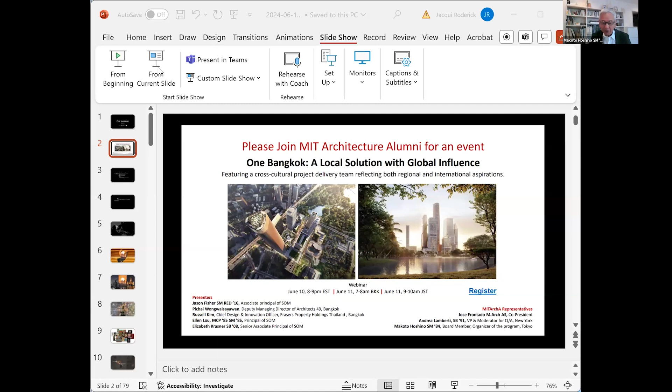I am pleased and honored to join you as an organizer of today's program held by MIT AA, but honestly, I'm a bit nervous as well. Probably more nervous than the day I turned in my thesis to my advisor back in 1984 at the MIT Graduate School.

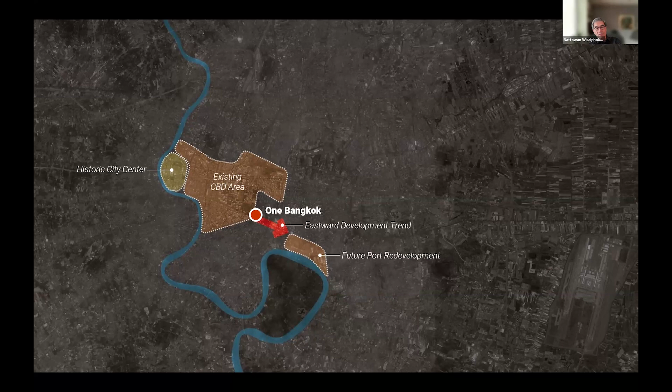The old, historic city center, you can see on the left, next to the main river through Bangkok, the Chao Phraya River. It comes from the north all the way down to the Gulf of Thailand. This is where the city of Bangkok started over 200 years ago. And then the CBD area keeps growing towards the eastern side. One Bangkok is pretty much at the edge of the existing CBD area, and the city is growing more towards the east. Jason, you can point out the future port redevelopment. That is about 1,000 acres of land that potentially will be developed soon, also next to the river. So if you want to add, Jason, please do.

Yeah, sure. It was an exciting opportunity for us at SOM to work on this fantastic site and continue with the growth of the city, and do it in hopefully a way that everyone loves. So yeah, very well explained, and thanks, Pichai, for the introduction. Go to the next slide.

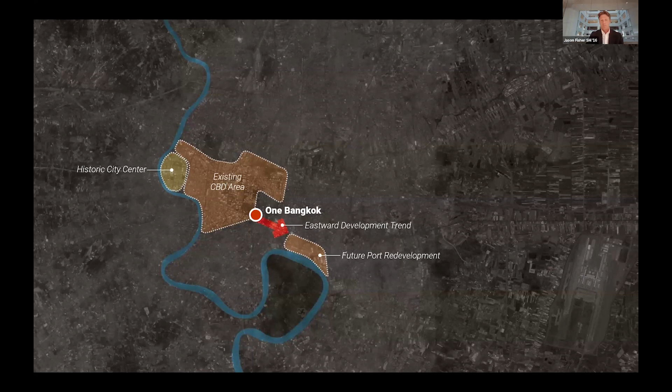So hello, everyone. Jason Fisher from SOM. I'm here in the Chicago office. We actually started work on this project back in 2016 with the overall master plan of One Bangkok. Between 2016 and the current day, we've been working alongside many other architects, designers, and engineers of individual buildings, and really benefited from the collaboration across the site.

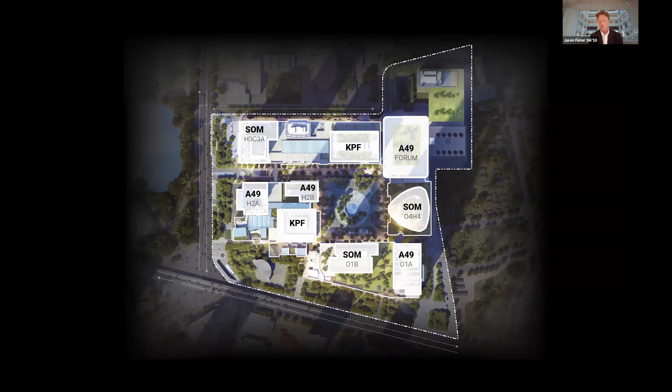So here you can see just some of the towers that are called out. There's KPF, there's SOM, there's A49. There's a whole retail environment done by other architects and designers, as well as numerous engineers and consultants along the way. What you saw on the previous slide was the overall master plan and design work after many years of development and collaboration between architects and our clients. But before we got there, we wanted to start with some of the important design principles and concepts from the start of the master plan phase.

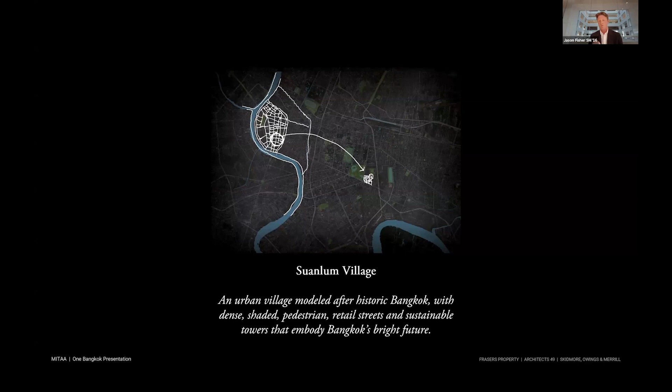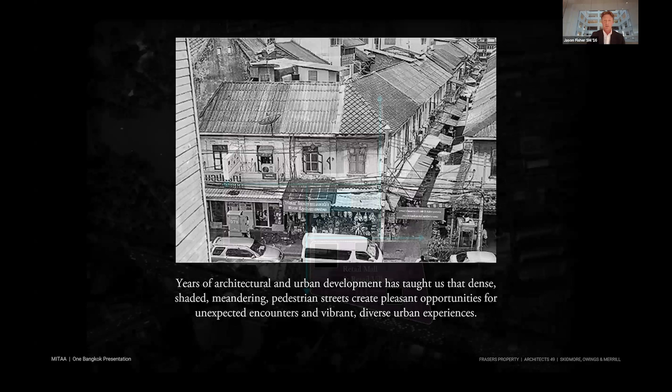Originally called Suanlum Village, we tried to organize a very large and prominent site by looking at the shape and pedestrian-friendly scale of the historic areas of Bangkok. So we tried to bring a little bit of that really nice chaos and intimate scale to the site of One Bangkok. These dense and meandering streets respond to the climate and provide a dynamic and varied urban experience. We tried to bring that experience and scale to subdivide this very large parcel, define distinct and complementary programs and uses, and accommodate a large open space at the center of the site. We'll touch on the importance of that in just a little bit.

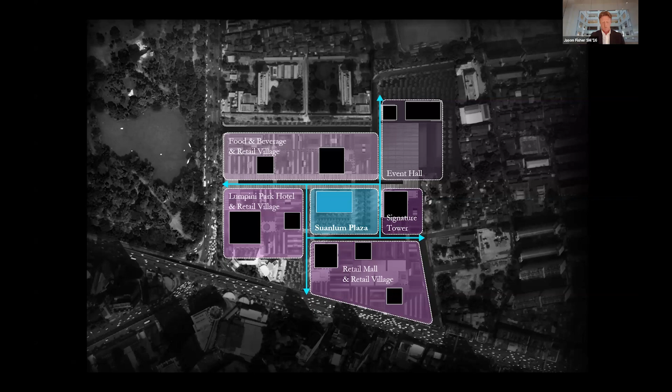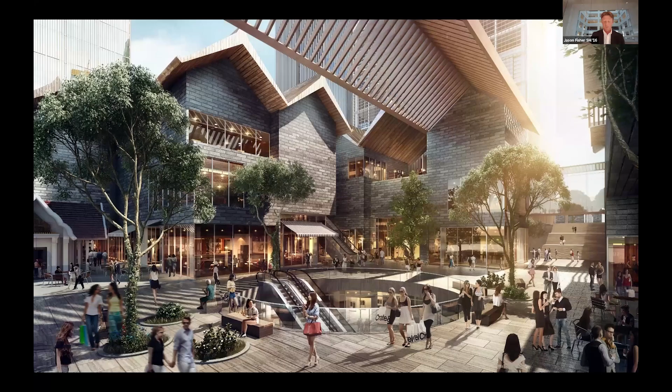Retail and pedestrian networks began to define a more intimate experience at multiple levels. You can see here the scale, the shading, the density of urban development. And to get to that point, we also studied the forms and vernacular of the architecture of the area. Very beautiful architecture that Pichai was mentioning previously. And then we tried to implement the forms in modern ways while still maintaining distinct architectural character and sustainability principles.

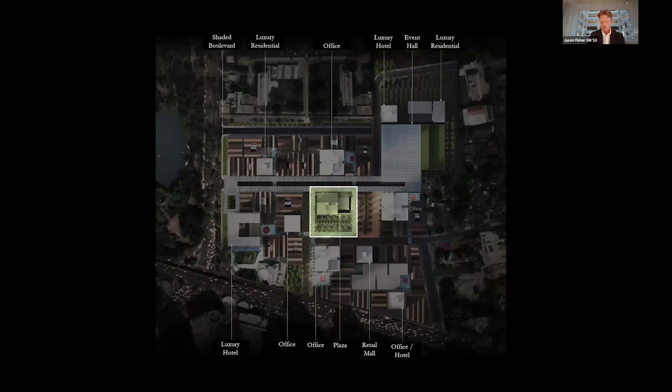We looked at specific examples of great public spaces across Asia, Thailand, the Philippines, China, among many other places in the region, as well as in our own backyard in Chicago, for inspiration and case studies as we developed the master plan. Throughout the master plan phase, we held on strongly to the idea of a great public open space shown here in the early version of the master plan.

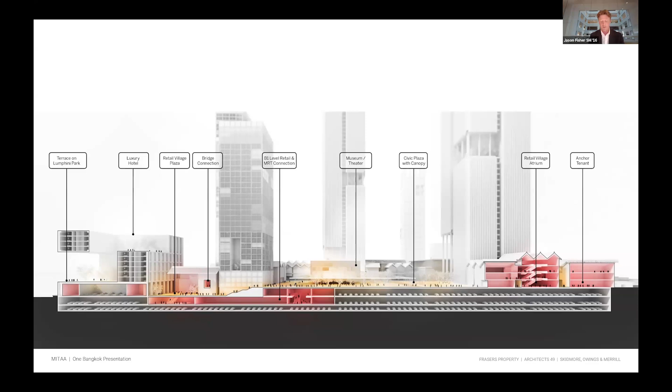And to achieve the best possible public open space, we leveraged grade change across the site to cover parking and vehicular circulation and prioritize pedestrian circulation across a multi-level ground plane. Of course, we couldn't ignore the stunning landscapes across the country, and particularly adjacent to our site with Lumphini Park, one of the great large-scale green spaces of Bangkok. And here you can see an overall view of One Bangkok from Lumphini Park, creating an impressive new skyline looking east.

And before tackling the architectural design of these buildings by SOM, a few important things to note. First, the overall site, scale, and design principles of the master plan remain throughout the entire process. And second, shortly after the master plan phase, other architects joined the design process, which created a really great collaborative effort. I recall design meetings in our evenings where KPF was presenting and we were listening in, and then we would present and other architects were listening in.

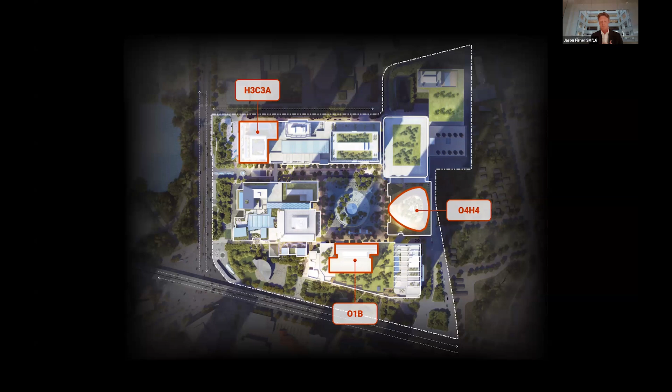And it was a way to test the validity of our ideas, hear a local perspective, refine our ideas, and then keep the process going. So it was kind of like the great studio environments that we all know, but done at a professional scale and on a really fantastic site. Of the three buildings from SOM here shown on screen, I'm going to dive into a bit more detail on the tower on the far right, which is the signature tower and was my particular role on this project as an architect.

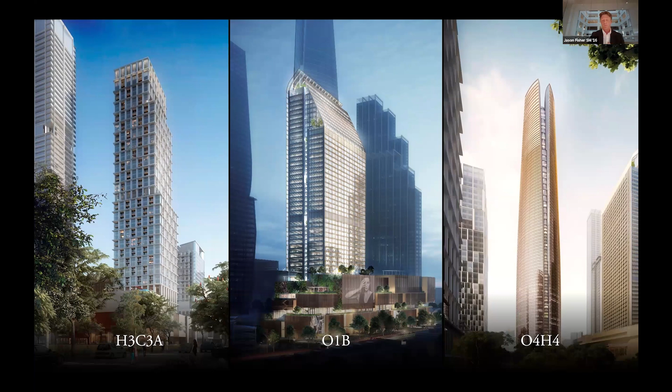So we call it the signature tower primarily because it's the tallest building in the master plan and anchors the edge of that open space. And from the beginning, there was a desire to find a form that made a strong impression on the skyline, but also related to the city through nature, culture, and climate. We tested several approaches, but landed on a tower form that related to the specific flora of the region. So here there was almost like an accounting of all the different flowers that we found prevalent in the area.

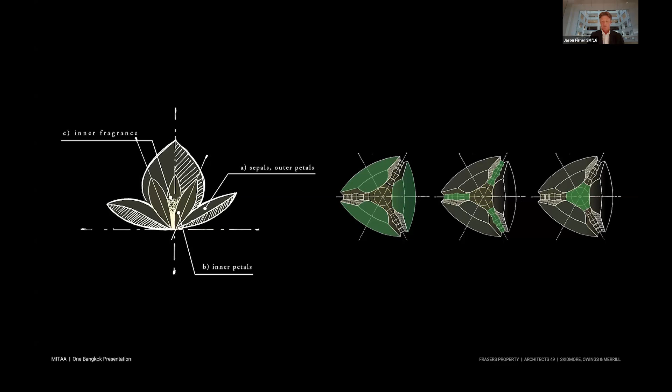We examined these components of the flowers and related them back to the facade and interior spaces of the building. So here you can see even some of the soft curves of the form we were trying to draw inspiration from. The shape and tapering was not just an exercise in form making, but was actually derived from lease depths of office space, as well as floor plan arrangements of hotel rooms at the top of the building. So you can see the program stack on the right-hand side, very typical for these mixed-use buildings to have some taper. And we tried to really reinforce that idea of the relationship back to nature.

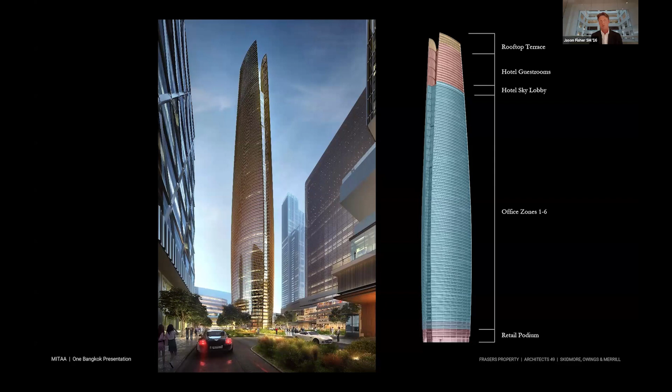Throughout the design process, we looked to local culture, vernacular architecture, and landscape forms for inspiration. You see some of the flora, you see the Lantern Festival here in the middle, and then some vernacular architecture where we're trying to draw inspiration of geometry and lighting and other architectural elements.

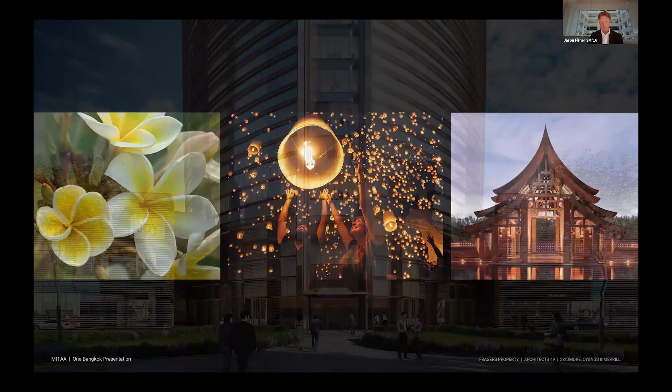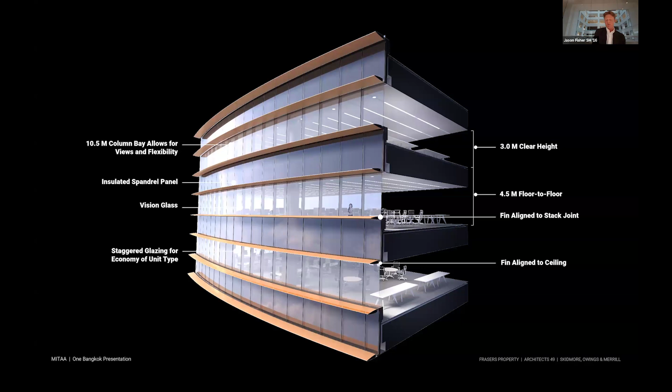And at the lobby of the building, we proposed a series of kinetic louvers that would change position depending on the location of the sun. So you would benefit from views out, but be able to protect the interior spaces, much like a flower might change its shape and orientation as the day progresses. The typical office facade has a series of deep louvers for shading, reinforcing that diagram of the outer petals being a protective element of the flower shape.

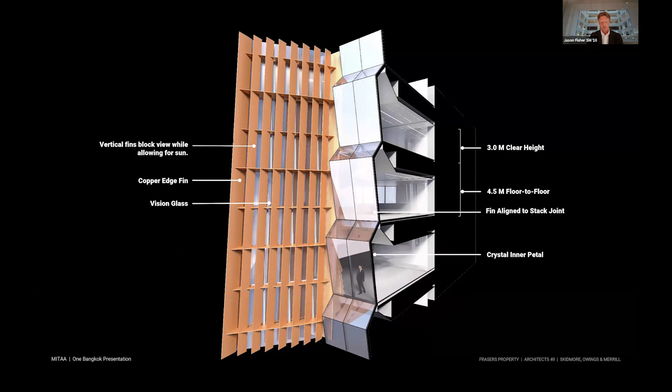The seams in between the petals were a series of vertical fins to direct views out while maintaining privacy between hotel rooms, especially at the top of the building. Here you can see the fins orienting your view. And the benefit of that was we were able to achieve stunning views out to Lumpini Park and the surrounding city from the upper levels and from hotel suites.

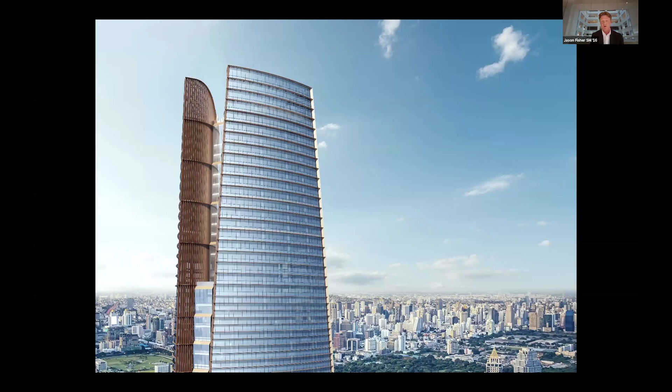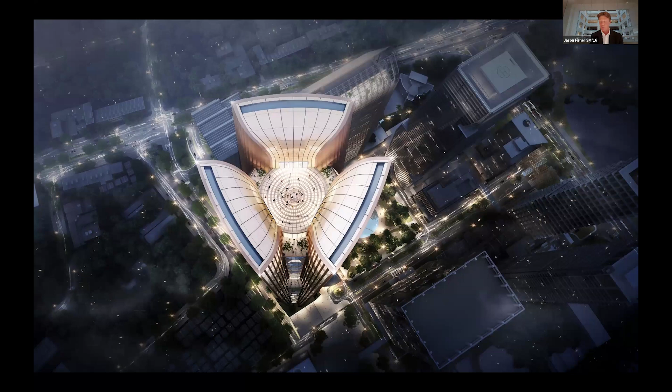So here the shape and expression of the organic form is seen above the surrounding city, and we hope that it was a form and an icon of the city that could be related back to the place that it was created. Being the last phase of the overall master plan, we are looking forward to upcoming design work on this building. And with that, I'll hand it over to Pichai to talk about the work of A49 and his team on the site.

Thank you, Jason. We have been fortunate enough to work on this project. It's been our 8th year running, and we will have the grand opening by the end of this year. And then right now, like Jason said, we are working on the O4 tower, signature tower. Hopefully, it will be happening soon.

I'd like to present 3 smaller projects on site that would be part of the master plan that was gracefully planned and designed by SOM. And we stick to that from the very beginning until now. And I think it proves to be working quite well.

Next, please. Location-wise, the H2A hotel is over 200 keys, sitting in front seats facing the main park. Lumpini Park is very historical and similar, in a way, to New York City's Central Park, but it's much smaller. It's an old park that everyone cherished. However, we have the site located here, so we have to take full advantage of being a hotel sitting in front of the park itself.

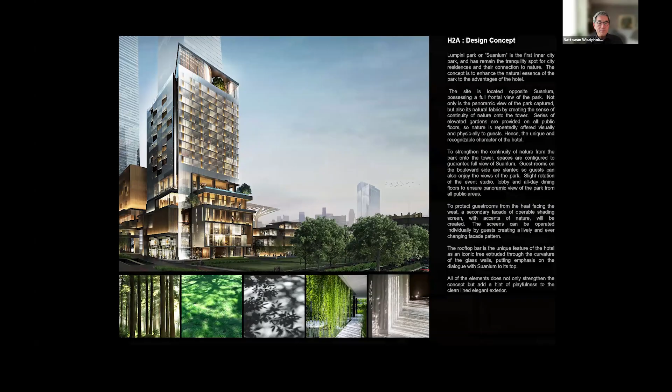So this is pretty much the view towards the park. Not quite exactly the size of Central Park, New York, but it's good enough. It's very important historically, and it's also part of the lungs of Bangkok, where greeneries are scarce. So you can see in the plan itself that we try to capture the view of the building. Being a small plot, we have to try our best architecturally to take advantage of being in front of the park itself. Next, please.

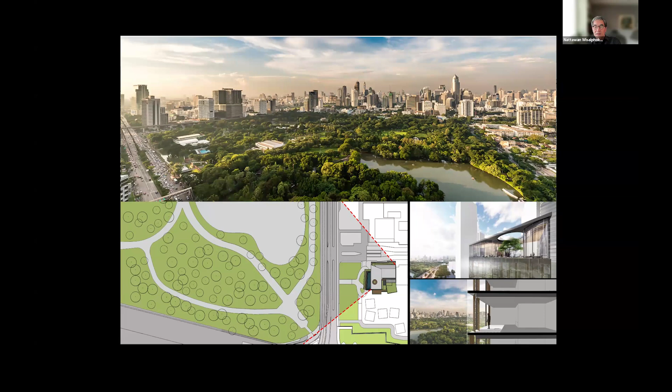So the conceptual diagram of the tower itself is like an L shape facing the park. We want to make sure that the building has dialogue with the smaller scale retail in the base, and also the backdrop of the high towers behind the hotel itself. We want to bring in the greeneries from the park towards the building, so it does have its own dialogue between the building and the park itself. Next, please.

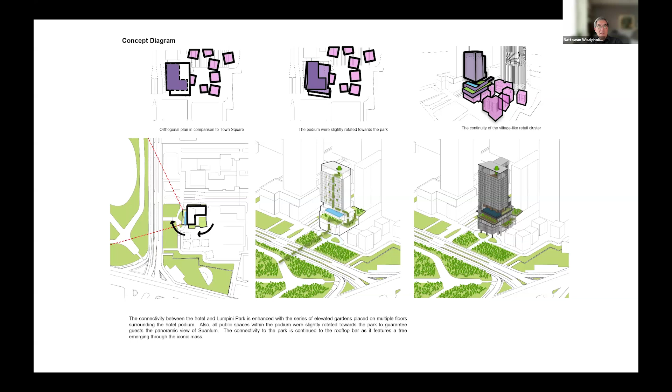You can see in the layout, in the plan of the typical guest room, that the majority of the guest rooms are facing the park. Even though we have it sideways, we try to tilt it so that once you enter the room, you can have a great view towards the Green Park, as well as the simulation in the rendering on the right-hand side.

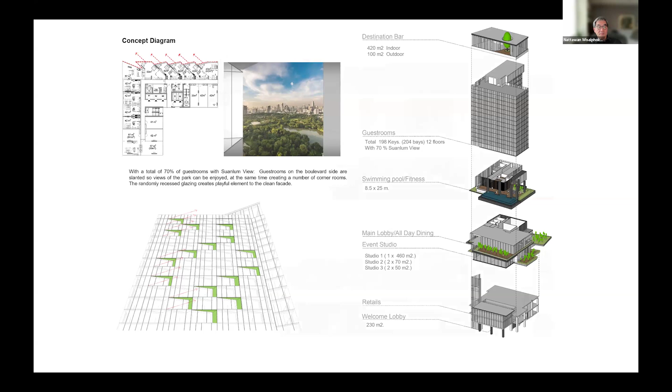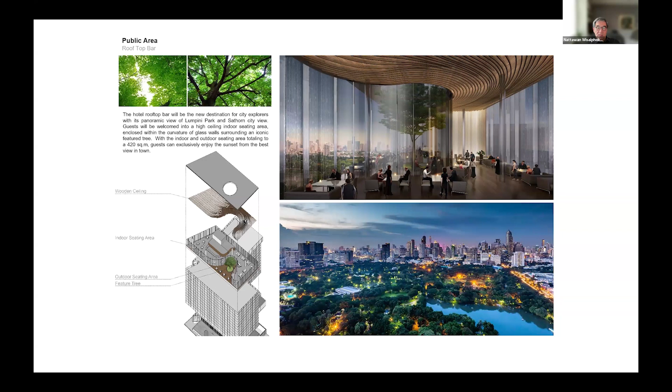And the building itself has tiers of greenery. It's bringing it up also to the top, where the destination bar and restaurant is. And we want to bring the trees to the top of the tower as well. Next, please. So that's the restaurant at the top, and we want to make sure that it caps off the scenery of Bangkok City, in particular at night. Next, please.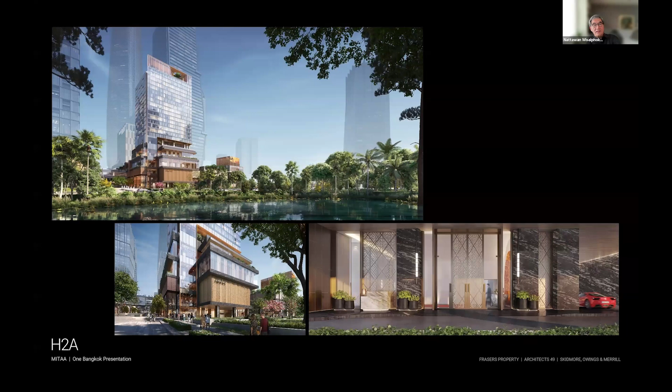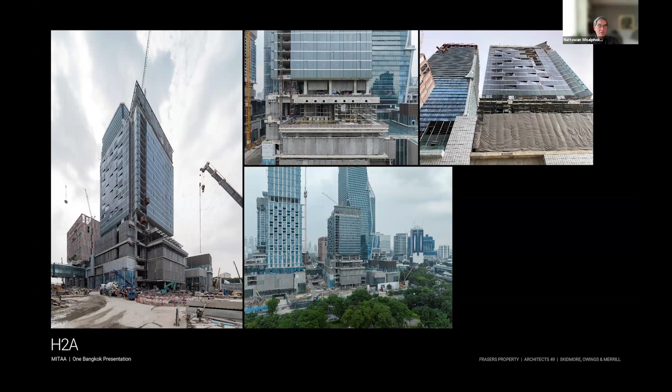So this is the construction stage photograph. I'm not sure we have today's real photograph in the presentation, but it's pretty much cleaned up, and it's going to be ready for the grand opening by the end of the year. Next.

So the second building, H2B, is another small one; it's like a boutique hotel. This is the smallest building on site. The size is about 20,000 square meters GFA. It does have its very key location sitting on top of the Civic Plaza, which is the open space in the center of the whole master plan. Next, please.

So in this building, we are looking at bringing back the old Bangkok towards One Bangkok, in line with the master plan ideas that Jason mentioned early on. This is the old Bangkok, which is over 200 years old. The architecture is more the combination of Western classical architecture blending in with the tropical climate of a tropical country like Thailand. So you can see the mix, so-called colonial architecture, which you can see around Bangkok and also in many areas of Southeast Asia. So we try to bring that language back into the modern buildings that we're working on today. Next, please.

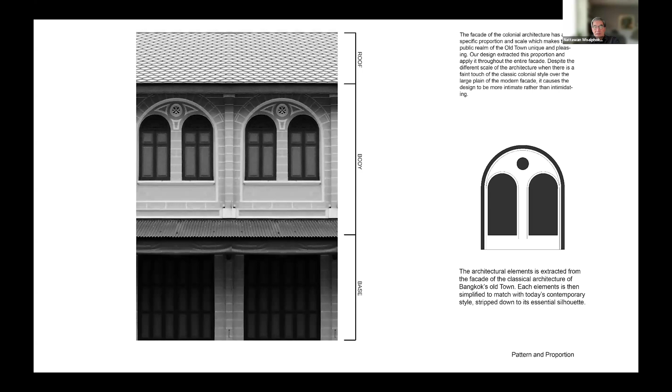And those are samples of the buildings in the old city of Bangkok, where it started. Next. We try to take the proportion of the openings and the form so that can be replicated in the building in a modern way. Next.

And that's the result, the final scheme that we have finally achieved. We have been working for quite some time on this small building to be part of the project. But for us, it's very important because it's the smallest baby on the project. We want to make sure that it has its own character that also anchors the Civic Plaza, which is in the heart of the project. So we have that great opportunity to be a little bit more playful and colorful. So we want to bring that old Bangkok in a modern way into the heart of One Bangkok. Next, please.

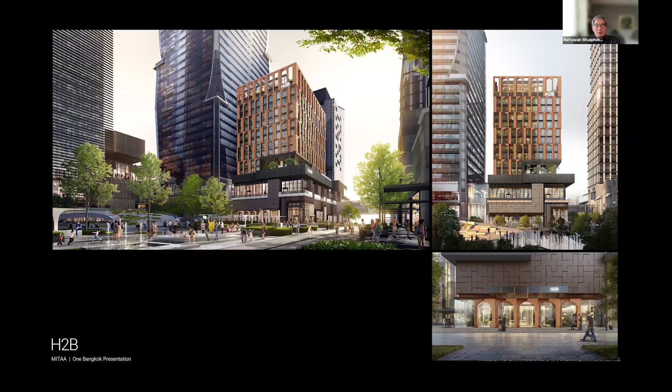And that's the photograph of the construction on site. This was probably taken a few months ago. Now it's all cleaned up. And I think we did achieve what we were looking for. Next.

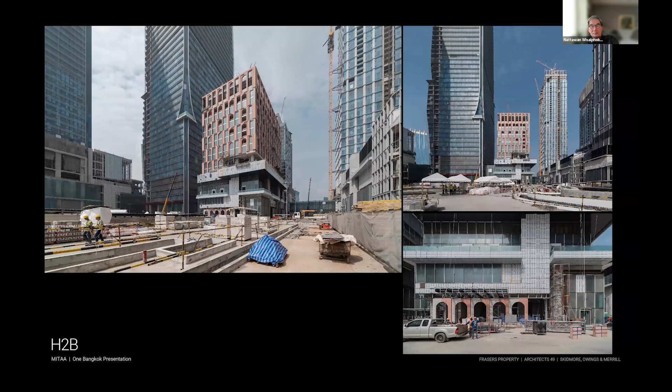And the last project I want to present to you today is the Forum. The Forum is about 30,000 square meters of space for art and culture. The building is going to be used almost like a mixed use. No, it's like a multi-purpose kind of space, but aiming more towards art and culture and entertainment and music and shows and concerts.

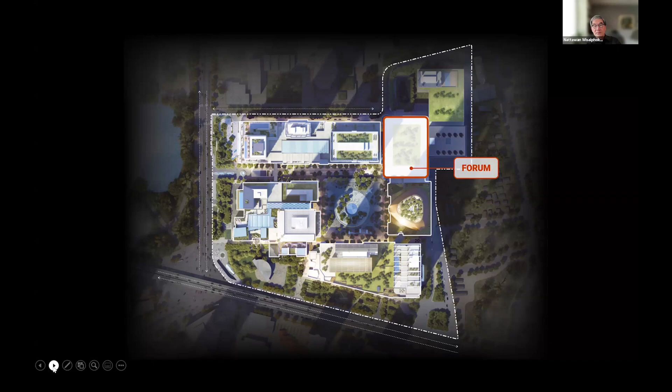The building is tucked in the corner between the signature tower on the south and, on the west, office tower 03. Next, please. So site-wise, it's located almost at the corner. This is the view axis that we feel is very important to the project because it's sort of well hidden behind those two towers in the corner. So we are looking at an organic form and want to make the building unique and standing out, being a smaller building on the plot. Next, please.

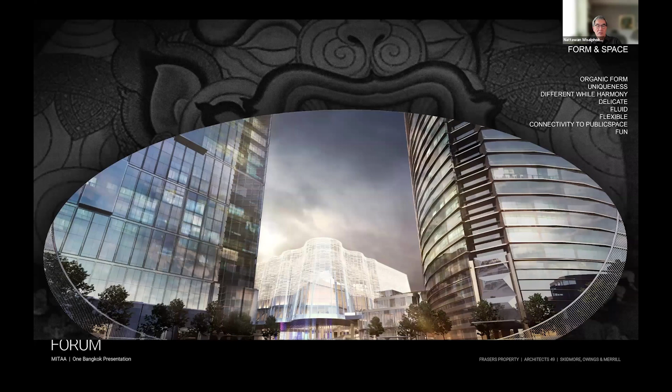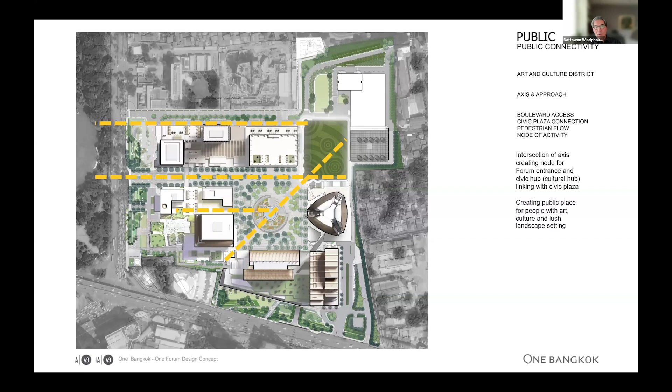So we look at art in various ways; we want to make sure this is the place for art. It's probably the only cultural building on the project. Next. Location-wise it's at that corner, but it does have a very important axis connecting the corner of that building to anchor, also working with the Civic Plaza and the arrival approaches for everyone coming into One Bangkok. Next.

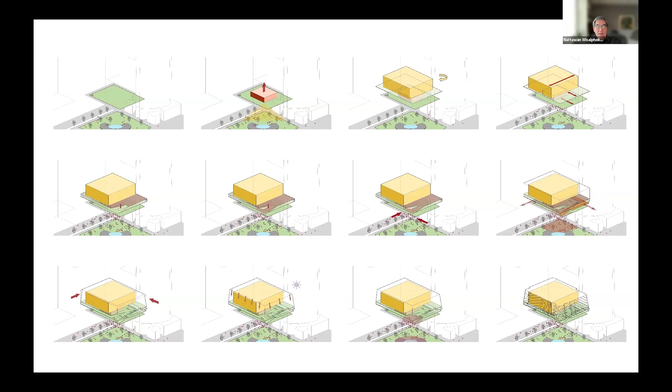In terms of design of the mass, we want to make sure that the public space of the building has a dialogue with the open space in the center and the Civic Plaza of the project, so that it does relate functionally as well as visually to the building. Next.

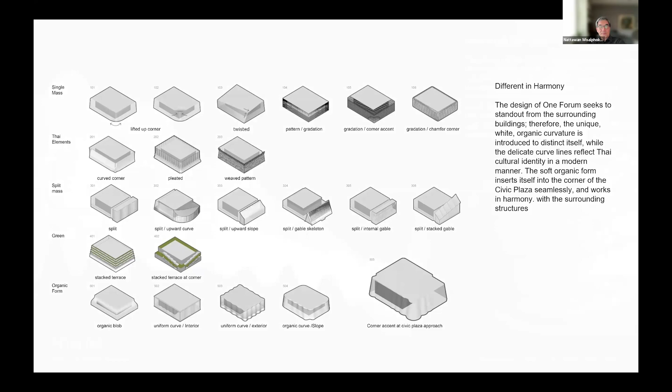So in terms of form, we look at something that relates to Thai culture, which is the fluidity of water. Thai culture and water are closely related. You can see that the city itself started from the riverbank of the Chao Phraya River. We are a country with lots of water. You can find that flooding comes around quite often as well. But in a nice way, we like the fluidity and the softness of the water, the rhythm, and it also relates to the site itself.

The site was the first location of a radio station in Thailand. That's why the road next to it is called Wireless Road. So we want to make sure that the waves also relate to radio wave signals. So we try to blend the softness of the water and the wave form into the building. Next, please.

And that resulted in the facade. We look at the building being white to reflect whatever activities or events they're gonna stage in the building. So the building can be changed from time to time, depending on what's gonna happen inside. And it does, in a way, contrast with the surroundings a little bit, but at the same time, it will work in harmony with the surrounding buildings in One Bangkok.

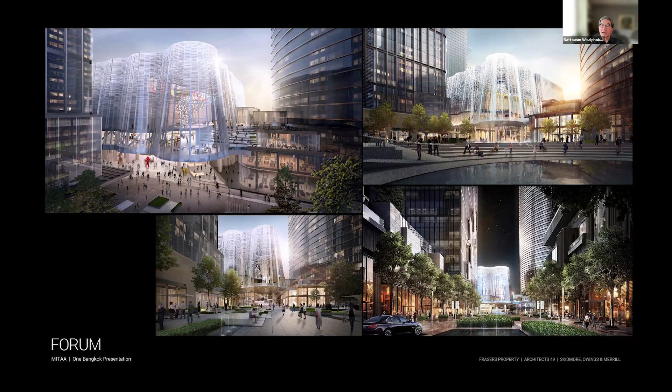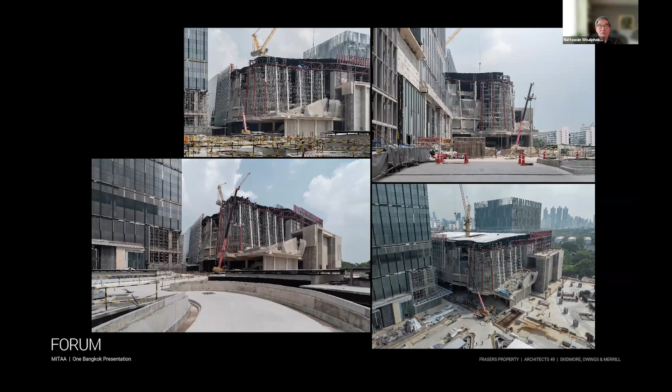Next, please. And that's the result of a work that we worked on for quite some time. Next, please. Today, it's pretty much almost done. Next to Russell, I guess.

So it's my section. Hello, everybody. Thank you, Jason and Pichai, for such a great explanation of the projects within One Bangkok. It's been an amazing project by the two amazing architects, SOM and A49. As you can see here, the master plan obviously was provided by SOM and Architects 49, who's our local architect of record. But both of them have worked on many of the components within One Bangkok as well. Again, next time you're in Bangkok, please come and visit One Bangkok. Let me show you around.

It's a remarkable project. I've been on this journey for the last 8 years, completing the master plan design in 2016 with SOM and starting the concept design. But also at the same time, we simultaneously started the substructure and the foundation so we could expedite the whole process. So beginning in 2018, we started drilling piles, and we have over 2,700 of them drilled in, and excavating and substructure work soon followed after the piling.

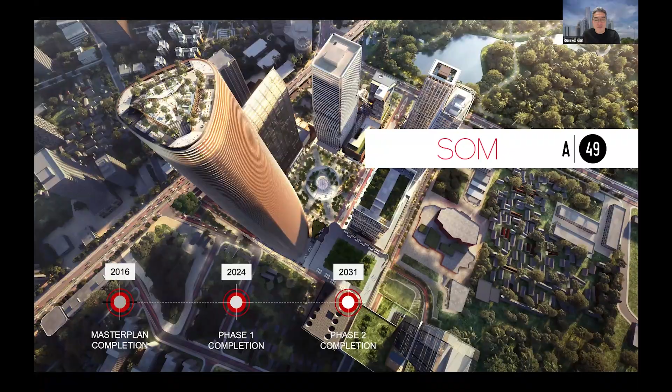Just to remind everybody again how large the One Bangkok project is. It covers a land area of 167,000 square meters, and we're building up to 1.83 million square meters of GFA space, which is close to about 20 million square feet, I think. One Bangkok will cover about 50% in public green space.

And everything that I say from this moment on is again the result of how we've set up the master plan from the beginning. So if you look at the perspective, we have Lumpini Park to the west and Benjakitti Park to the east. This Benjakitti Park used to be a tobacco factory when I first joined the company to start the project, and it's been converted into a landscaped public park, and it fully opened, I think, last year.

So when you combine all the surrounding parks and One Bangkok, we're able to offer about 1.3 million square meters of green space, which is about 316 acres of urban landscape surrounding and in One Bangkok. Next. It's lagging behind a little bit.

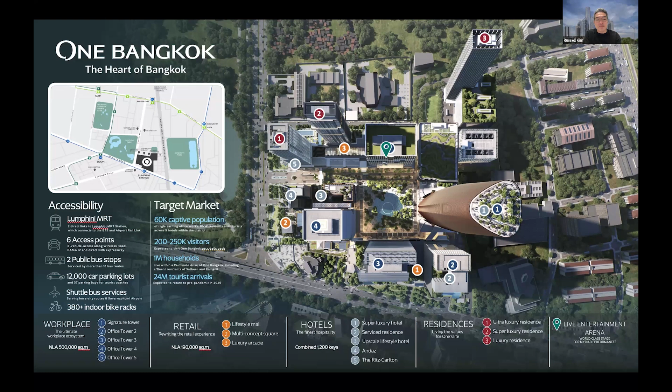Now, when fully complete, we're expecting to have about 60,000 captive population with up to about 250,000 people visiting daily. So approximately there'll be over 300,000 people on a daily basis at One Bangkok. Next.

And to see the One Bangkok project in perspective compared to others, we've studied various major urban redevelopment projects across the globe, like Hudson Yards and IFC Hong Kong, to name a few. If you look at One Bangkok, it's only taken 9 years to go from the design all the way to the construction completion of phase 1. We hold the record for the fastest and largest project in Southeast Asia by a single private developer. Next.

So we began on this journey with only 6 consultants during the master plan days, and grew to over 70 consultants, both international and local. And this number is still growing because we haven't finished phase 1, and we expect to get more in phase 2. Next.

And as part of the pre-planning, we tried to get the designers and the clients together to align on the proper understanding of expectations and requirements from day one, and finalize the design guidelines and the master plan principles before engaging with the rest of the consultants. As you can see on the left-hand side, we had a master plan consultant, a single team that regularly met to work out the details and complete the master plan dating back to 2016.

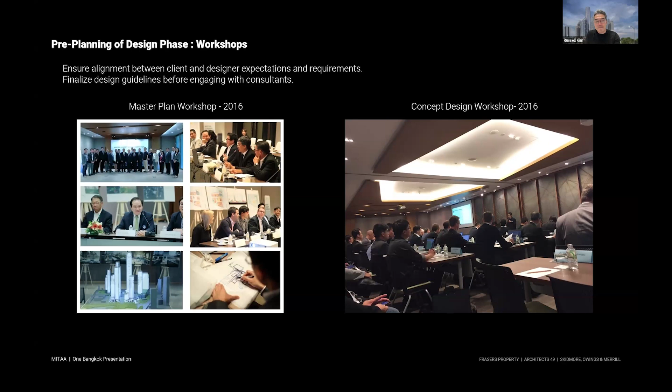And this all started with a single vision by the chairman of the group, Charoen, which was to create a place that people can love and spend time in, to feel like you're an integral part of the city and be a global landmark, shying away from a tourist destination, but really becoming a global landmark. And I firmly believe that we will be creating just that, if not more. So as you can see, we've taken the 3 core principal values and elaborated on them to achieve. Next.

And as part of the placemaking and many outdoor public spaces offered, One Bangkok will provide pleasant, walkable streets to enhance walkability, boost well-being, and increase social engagement, as one of many positive responses that came out of the post-pandemic era. Next.

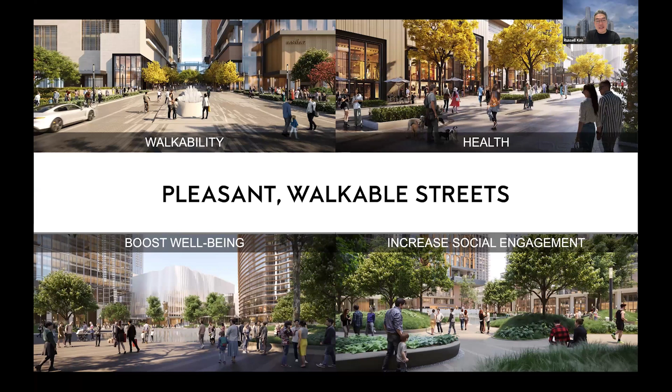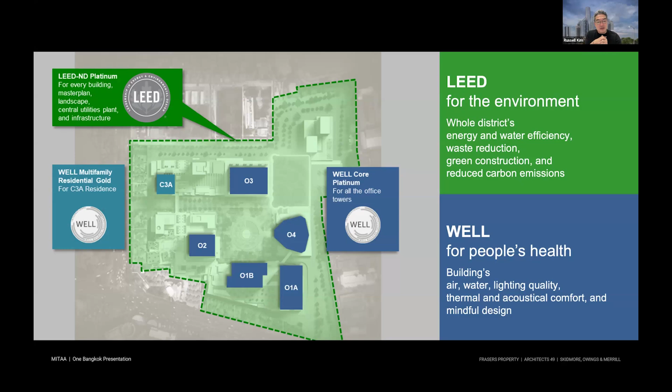And as part of the initial master plan principle, we aim to achieve the highest sustainability design standards. And I believe we set out to achieve that, and we have officially been certified as LEED Neighborhood Platinum. All of our 5 office towers will be WELL Platinum, WiredScore, and SmartScore Platinum. The first residential tower to achieve WELL Gold. Next.

So like I said before, we are officially certified as LEED ND Platinum, the first project in Southeast Asia to achieve such high standards. This has been a truly remarkable project by the development team with the design professionals. I believe we worked relentlessly to achieve the vision that was set out during the master plan days.

So again, thank you for listening to the project and the presentation by Jason and Pichai. And I hope you are inspired by the One Bangkok project, as I have been for the last 8 years. I think this comes to the end of my slide deck. Thank you very much.